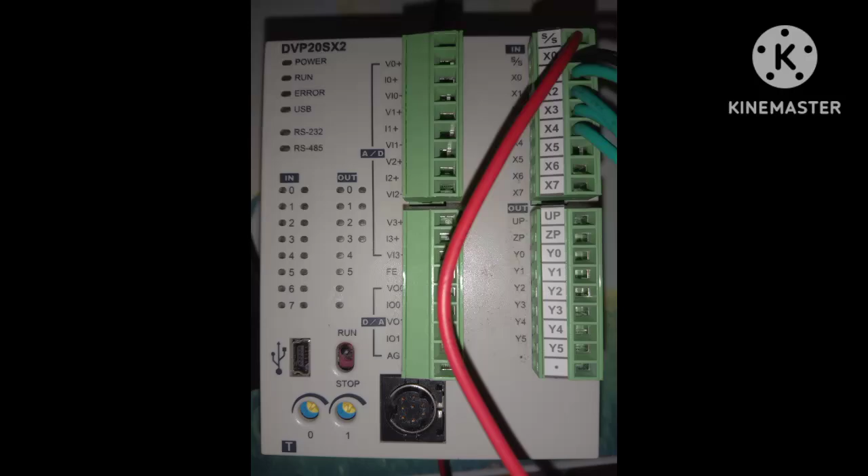In this video we are going to create a program in Delta DVP20 SX2 PLC. The task is something like this. We are using three outputs Y0, Y1, Y2 and only a single input X1. Okay, so here we have some setup for practical, like some switch and PLC. Now let's begin with the ISPSoft.

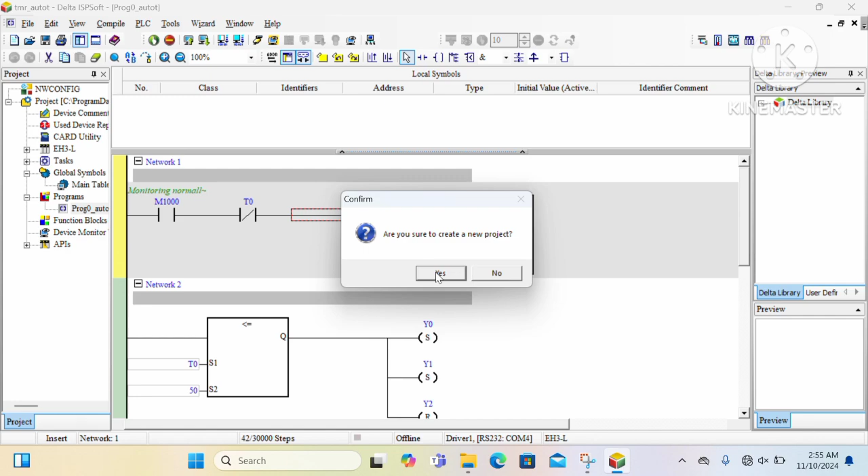Okay, so this type of program is very fundamental, very basic for some kind of packaging machines where we can use manual and auto mode. So here I'm targeting the manual mode through a counter and the automatic mode through the timer. So let me begin a program with the counter.

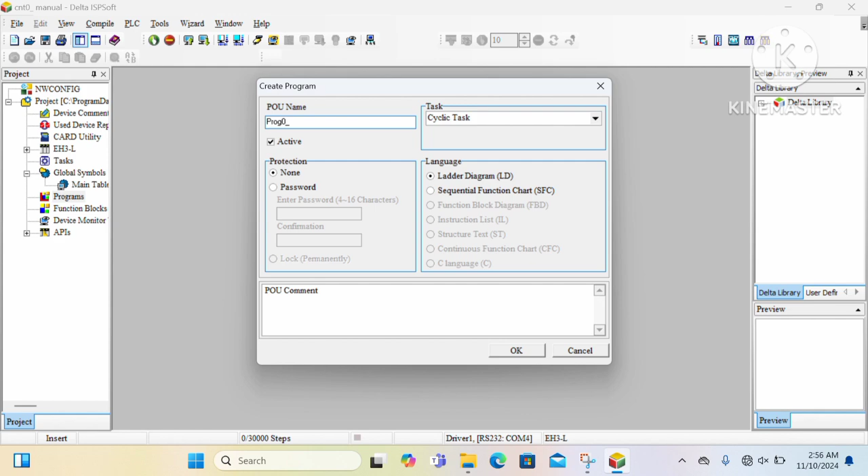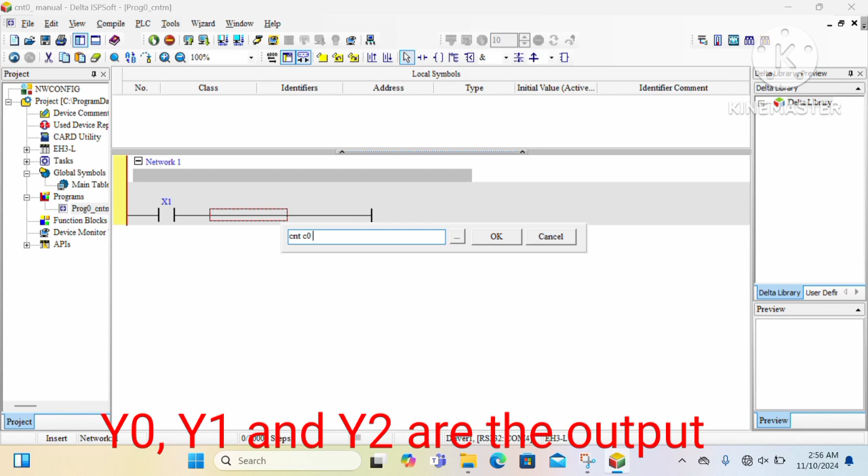Now let's create a program. Right click and new. Here you can give any name to your program. Let's take the input X1 for the counter pulse. You can also use a rising edge here. And this input feeds the counter C0, and the last counting value is 4.

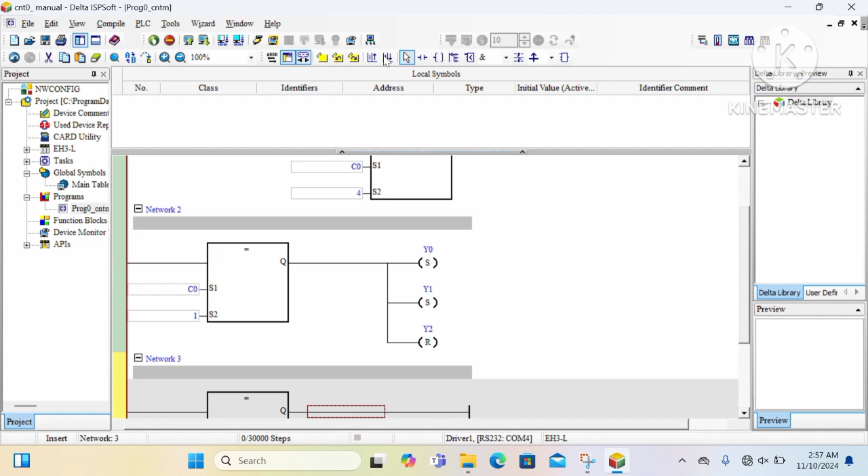Okay, in the new network number 2, I'm going to make a logic. If the counting value is 1, then it will set Y0 and Y1 and reset Y2. That means Y0 and Y1 will be on and Y2 will be off. In this network, when the counting value is 2, then Y1 and Y2 remain on and Y0 becomes off. So Y1 and Y2 become set and Y0 remains reset.

And similarly with the new network C0, when the counting value is 3, in this case we are going to turn on Y2, and Y0 and Y1 remain off. Okay, so here we go.

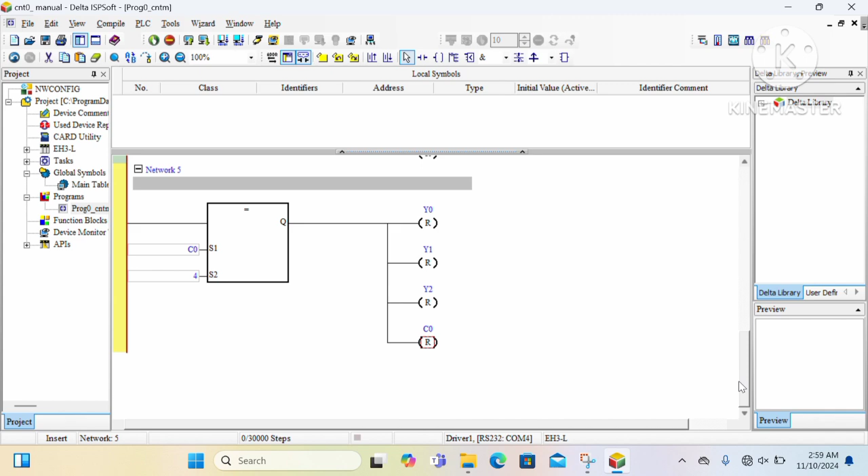Okay, now we are going to create one more network which resets all the outputs and resets the counter also. When the counting value is 4, in this case we are going to create a logic which makes all the outputs and counter reset. So in this way we can make machines work in manual mode. When you press a push button, only then it will act as per the program.

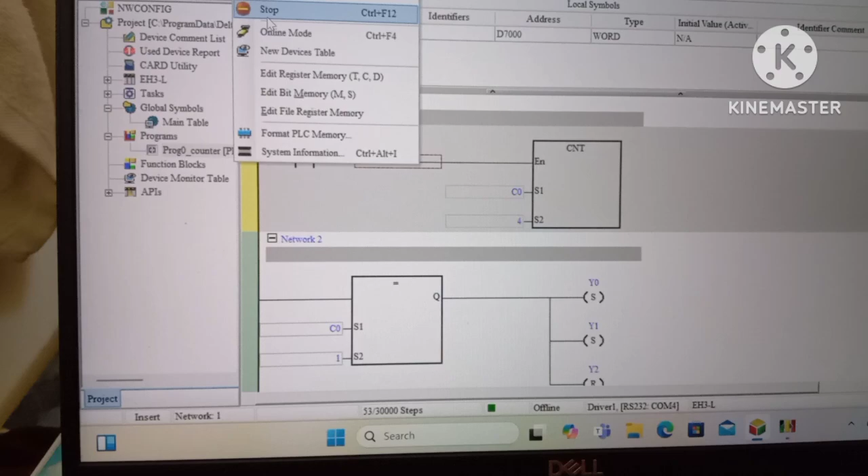Okay, so here the program is completed and now I am going to compile and check. Okay, this shows a message because we set the wrong PLC. The PLC is not exactly SX2, so we can change it from Tools. From Tools there is an option, Change PLC Type. So here we have to select SX2. Okay, now the setting is perfect. Now we can transfer, download the program. Okay, so it's all done.

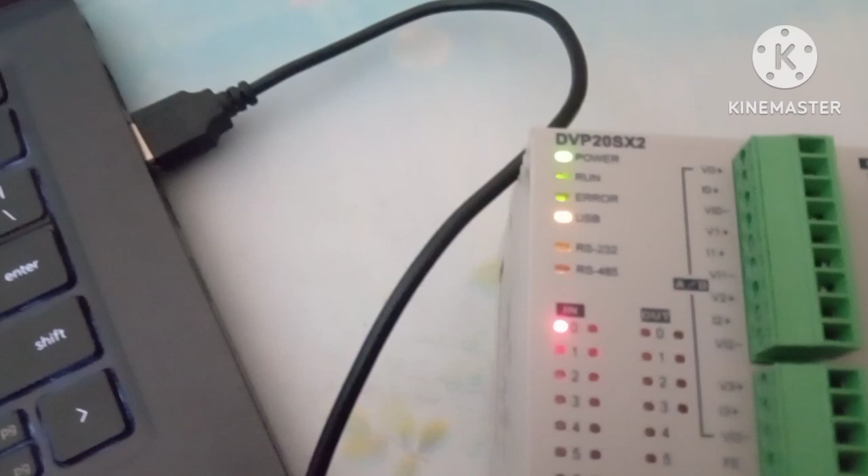Okay, now I'm going to press the X1 push button. Below that red push button, there is the push button which is fed into the X1 terminal of the PLC, and you can see when I press once, X1 becomes high, and Y0 and Y1 become high and Y2 becomes low. So here you can see when I press the switch again and again, it changes the output according to the logic in the program.

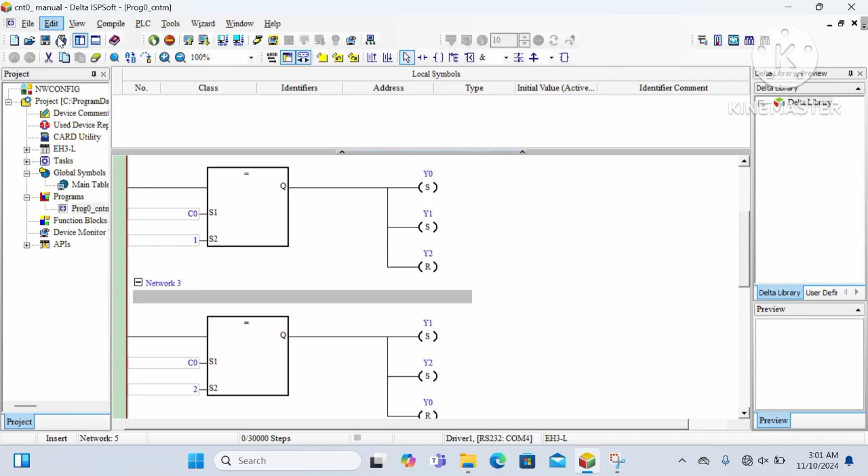And in such a way we can create a program for packaging kind of machines which have to work in manual mode. Now we are going to make a program for automatic mode using a timer and conditions on the timer. Okay, so it's all done.

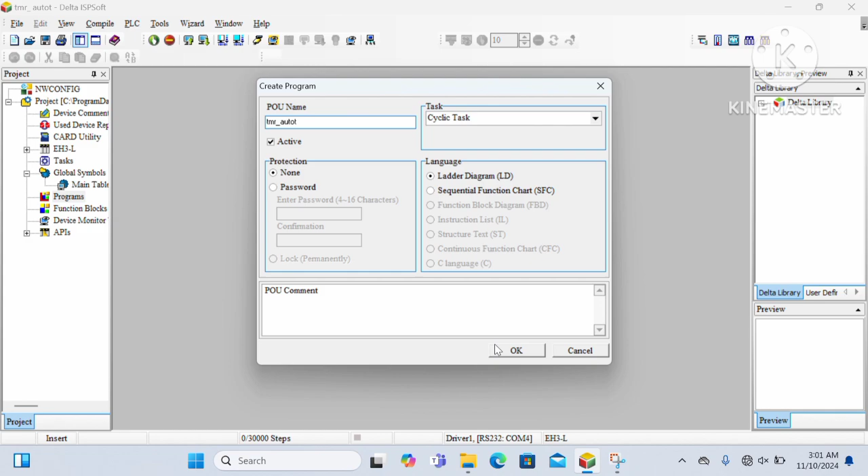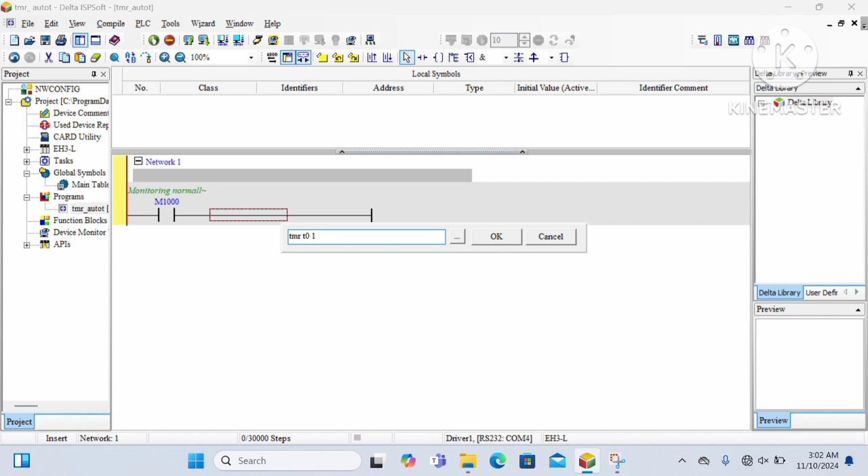Now we are starting a program for the timer, and for this we are taking an input which is the M1000 bit. This bit is normally closed, and now we are taking a timer T0, with a timing value of 15 seconds, 5 seconds for each output. So I set 15 seconds here.

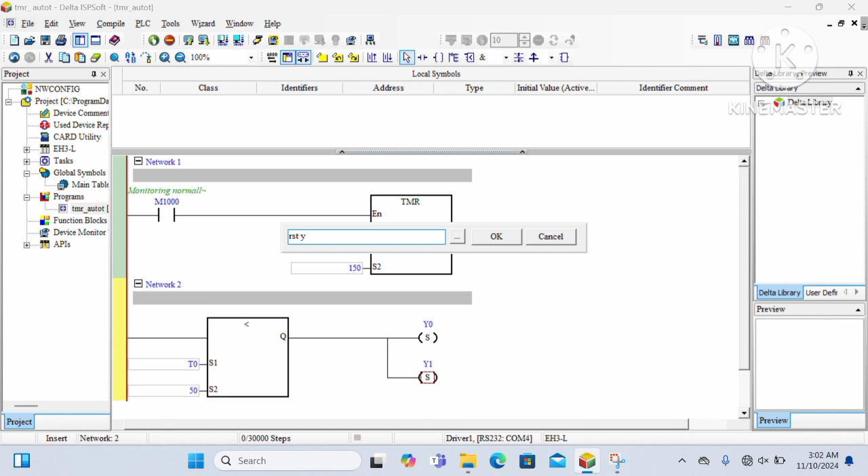And if the timing value is less than 5 seconds, it will turn on the first output, which is Y0 and Y1. It activates Y0 and Y1. At the same time, Y2 remains off.

In the new network, we are going to create a logic between 5 to 10 seconds. Between 5 to 10 seconds, outputs Y1 and Y2 remain on and Y0 remains off. Okay, so this is the condition where the timing value is less than or equal to 10 seconds. So set Y1, set Y2 and reset Y0.

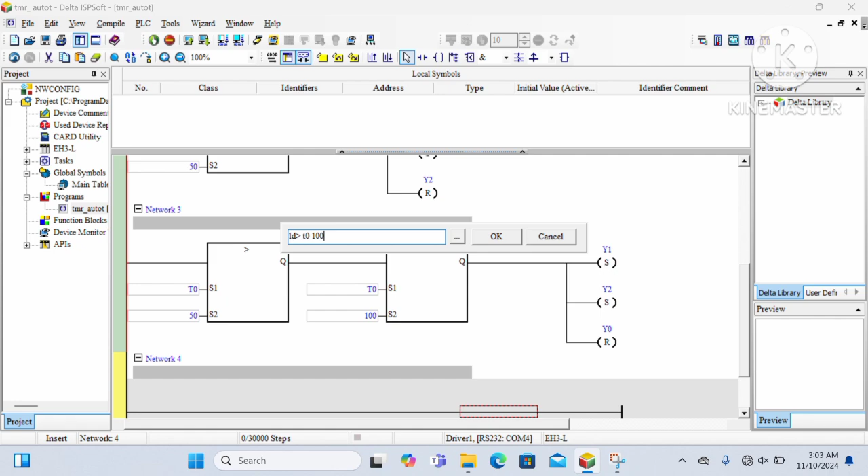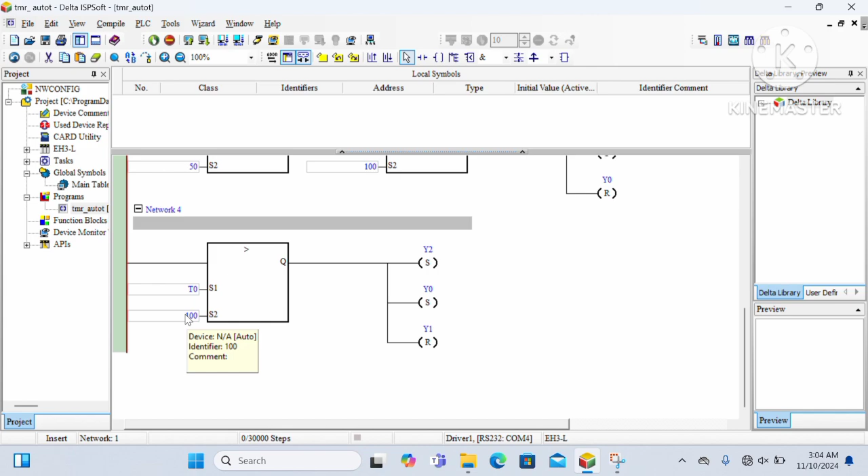Now we have to reset the timer automatically. If you want to reset the timer automatically, we have to put the NC of the timer before the timer block. Before the timer block, we have to use the NC of the timer itself. So here we can put the NC. In this way we can reset the timer automatically after completion of the timing that we set.

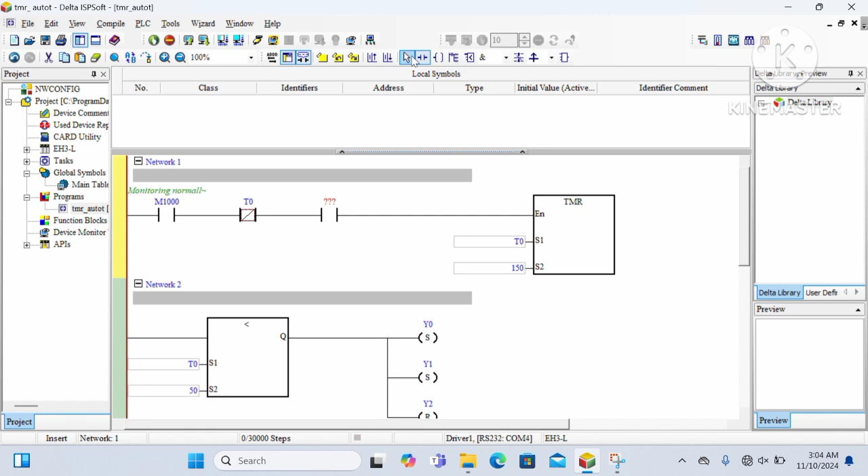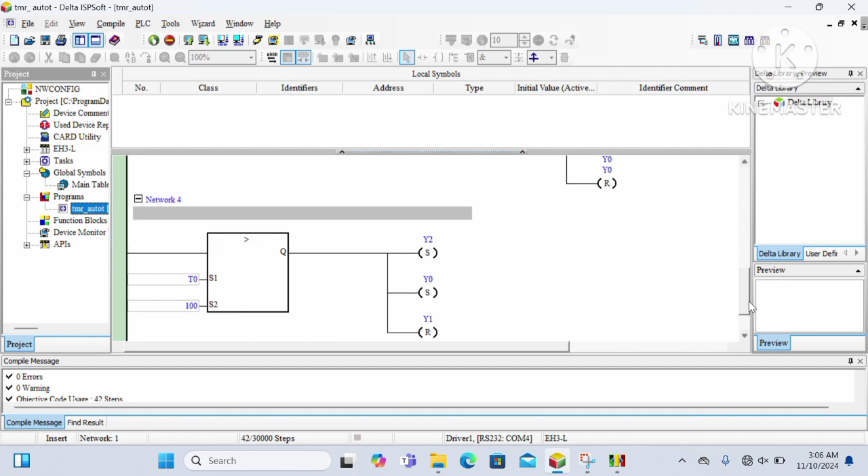Okay, now we can compile and check the program, and simulate it. I am opening the COM manager. I already set the PLC. It's compiled. Better to check for errors. Okay, now I am going to download the program to the PLC. Again I set the wrong PLC type. We can change it from here to SX2, and here we go.

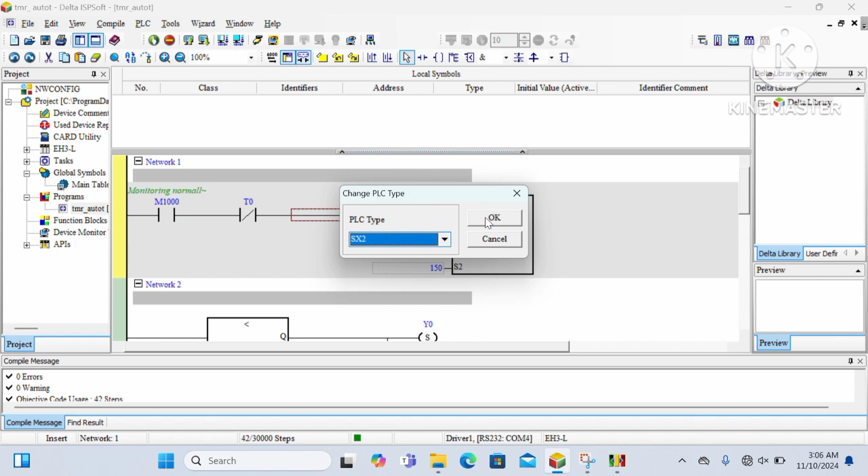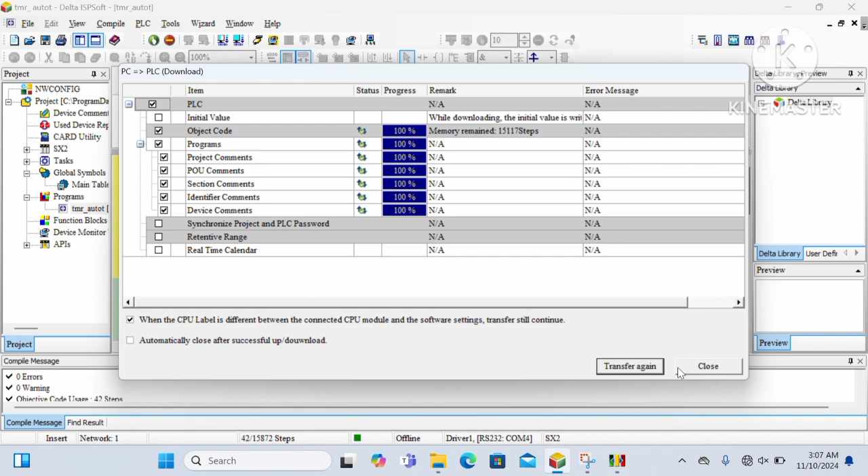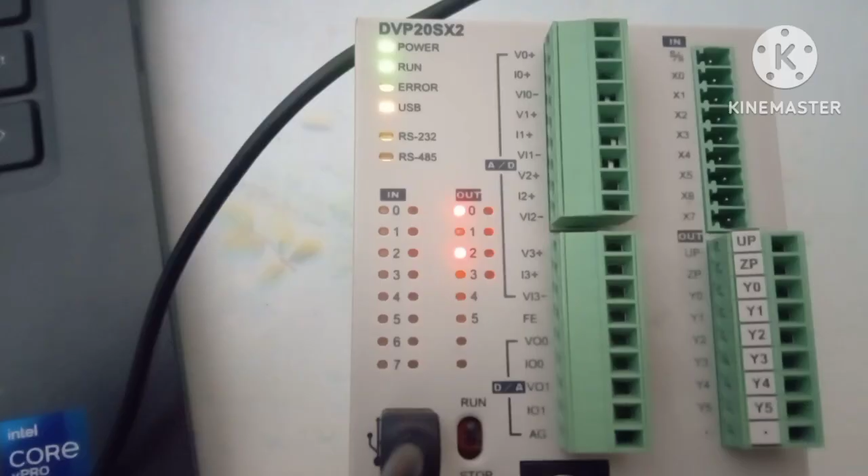And then after transferring the program, okay, so here it's completed. Now I can go online, and you can see the timing changes automatically, and it activates the outputs as per the logic. So you can see the logic on the PLC itself here. It changes automatically.